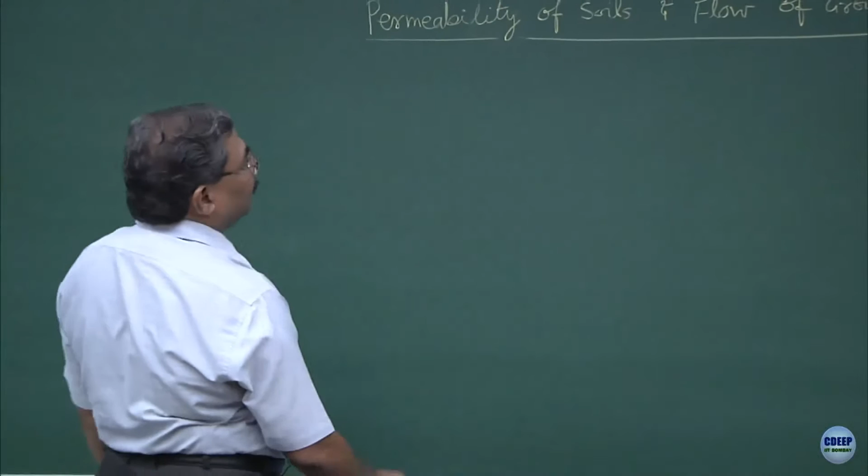So, to begin with the permeability of soils and the flow of groundwater. To make life simple, we assume that the soils are saturated. So this is assumption number 1. If you do not assume the soils to be saturated, this becomes a completely different discussion which falls under the realm of unsaturated soil mechanics.

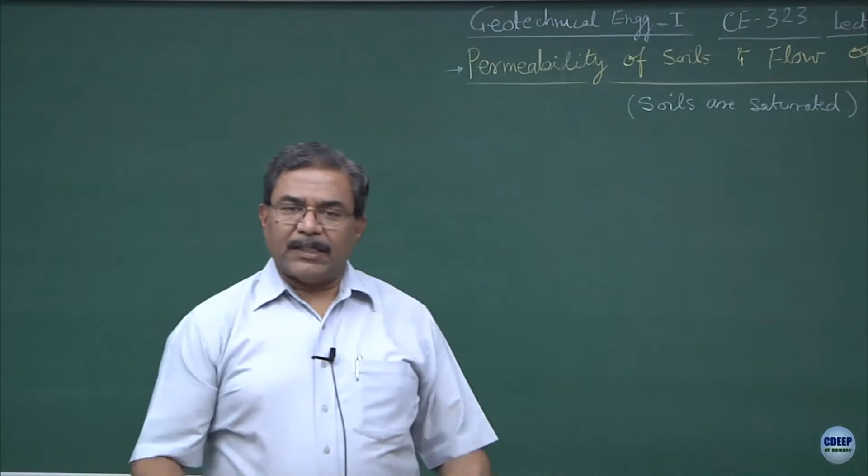At undergraduate level I will not be discussing the unsaturated state of the material, because the flow of water is going to be extremely complicated and cumbersome, and I will restrict my discussion to the permeability of saturated soils, or the flow of water through saturated soils. You have enough exposure to what capillary action does, what the unsaturated state of the material does, what the dry state of the soil does and so on.

So the best way to understand this whole process would be, you must have studied the Bernoulli's theorem in your fluid mechanics course.

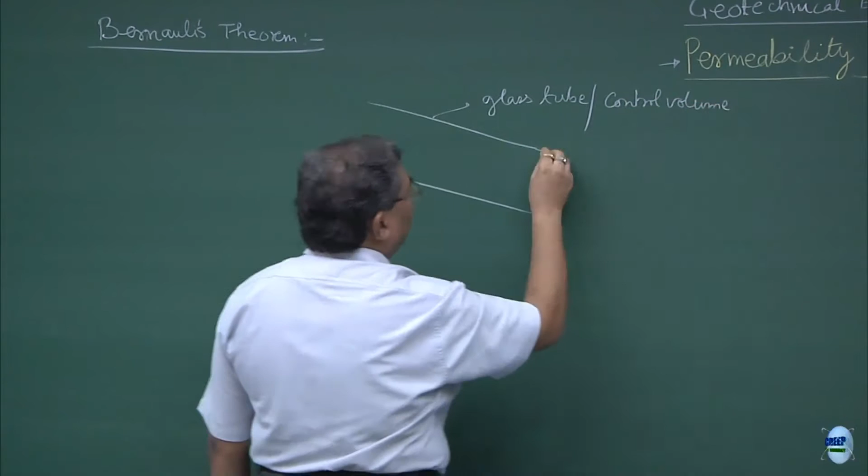Suppose if I take a glass tube, and if I allow... the glass tube can also be considered as a control volume, or this could even be a pipe through which the flow is occurring.

Now suppose if I assume that this glass tube, pipe, or control volume is frictionless. In your hydraulics course, when you deal with flow through conduits and pipes, you apply the friction factor as the C factor. But here, for the sake of simplicity, we are assuming there is no friction induced from the glass tube, pipe, or control volume, and at this point the velocity is V1, and at this point the velocity is V2.

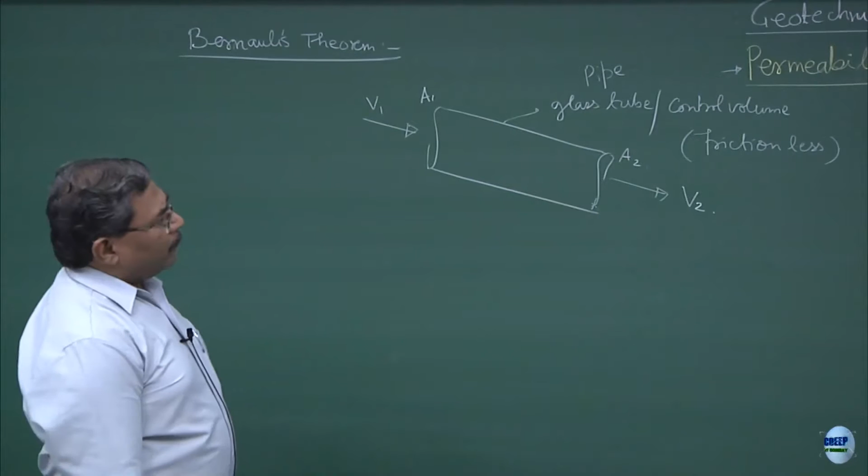If I know the area of cross section here as A1, and the area of cross section here as A2, what we are trying to do is find out what causes the flow of water between point 1 and 2. I am sure you must have done this exercise.

If I consider a datum somewhere here, I know what heads are acting at point 1 and 2, and the head difference is going to cause the flow to occur.

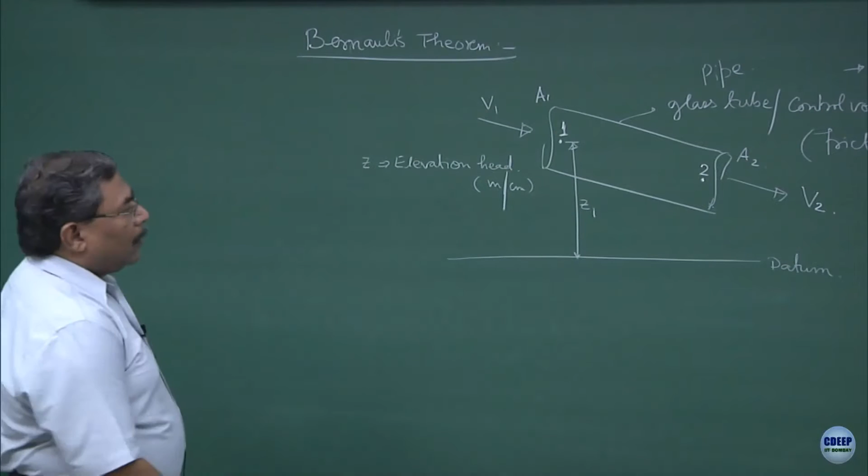So if I say at point number 1, the height of point 1 is, let us say, Z1. Now Z1 is defined as the location head, Z is defined as the elevation head, in meters or centimeters or whatever. So point 2 is located, let us say, here at an elevation head of Z2.

Now suppose if I say that the pressure head at this point, which I am defining as P1, and the pressure head at point 2 I am defining as P2 — P corresponds to the pressure head, and the units will be the pressure units. If I divide this by the density of the fluid, this becomes the height of the fluid, and the pressure can be converted into height also. So we have elevation head, we have pressure head, and the third one, I am sure you must have studied, is what is known as the velocity head.

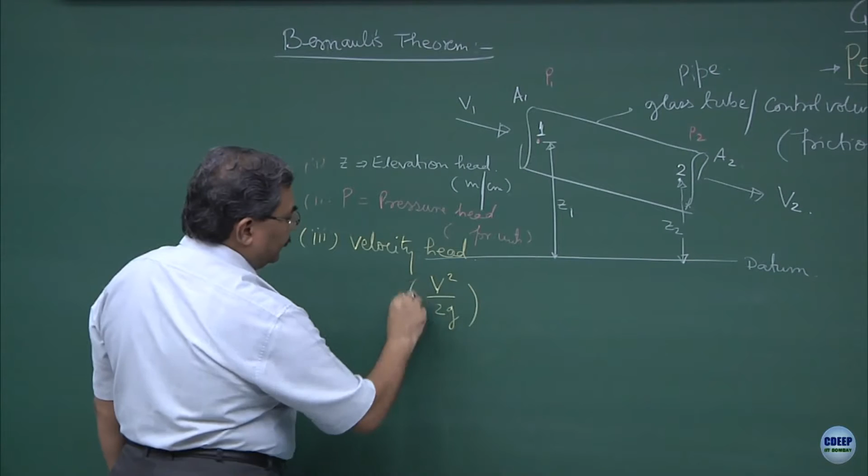Normally this is defined as V square upon 2G. Put together, that is 1 plus 2 plus 3, known as the total head. So if I say that the total head at point 1 is greater than total head at point 2, the direction of the flow is going to be from 1 to 2. Is this okay?

However, if I reverse the situation and say that TH2 is greater than TH1, the flow is going to get reverted, it will be from 2 to 1. So what we are trying to analyze is a situation where we can establish the direction of the flow in a glass tube. This is nothing but your Bernoulli's theorem.

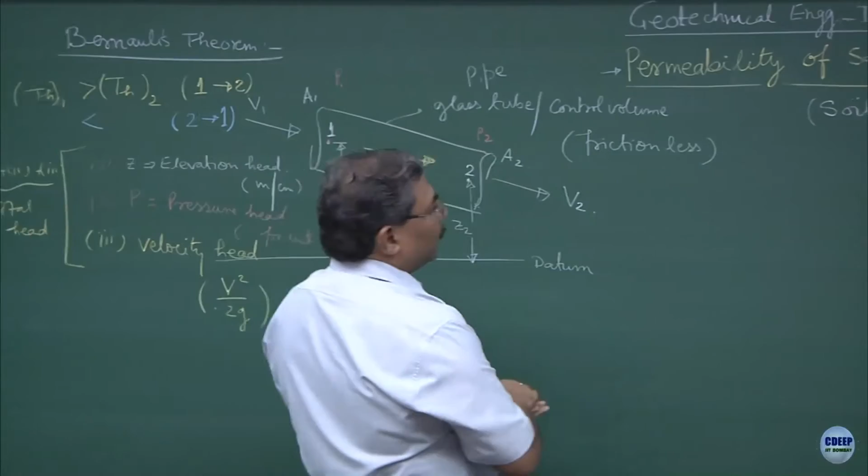Now most of the time when we use these concepts in cases like soils or the porous media, what is going to change? Suppose if I want to extend this to porous media. So porous media means, yeah, you have some doubts?

Total head is a general situation, okay. So your objection, but I have given A1 and A2, area of cross sections are different. So V2 is different than V1, I think this is okay.

Yeah, I will come to this point, just keep this in mind. So for the time being there are no frictional effects, we are ignoring it and we are trying to see whether the total energy concept can be utilized to establish the direction of the flow. Total head, always total head, velocity also has to be included, elevation has to be included, pressure also has to be included, always remember.

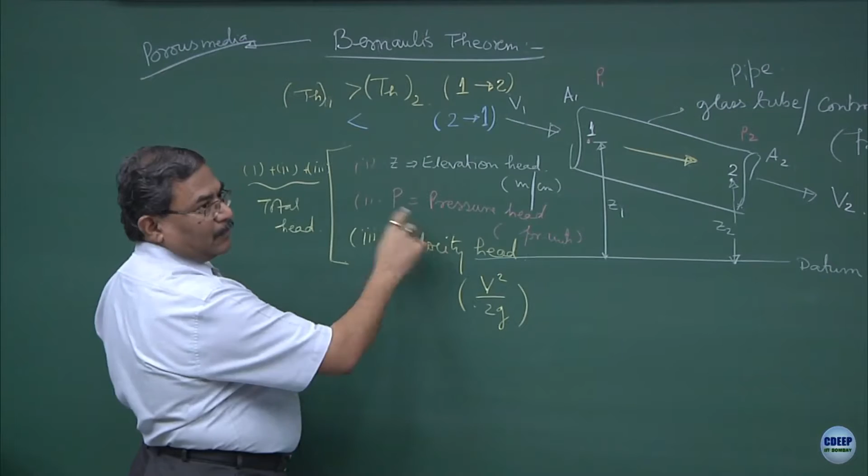Yeah, I will come to that, but unless you have created a context, what you are saying is not correct. So now let me create the context and that is what I was trying to do here. So the moment you extend this theorem to the porous media, now what you are saying is going to be correct. That means what I have to do is introduce an element of a porous media somewhere in between.

So suppose if this is a compacted soil mass, so what I have done is I have taken some soil in the loose form and I have compacted it within this tube to create this state of the compacted soil mass.

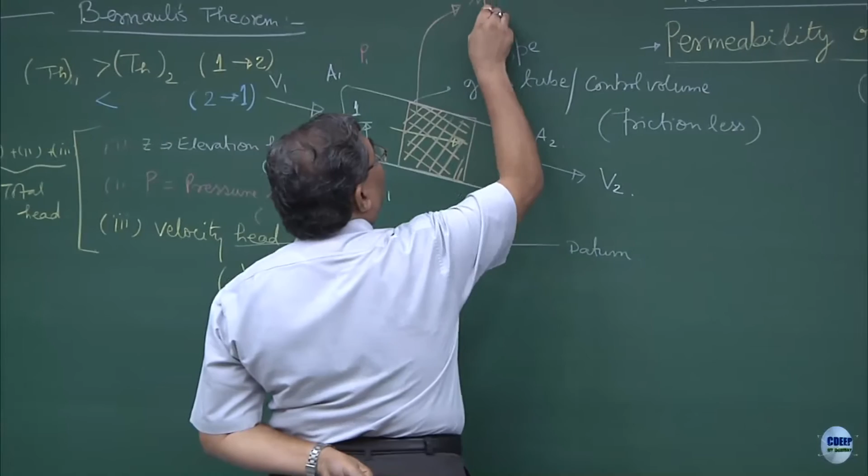So when you say compacted soil mass, the attributes of this control volume are going to be porosity, void ratio, gamma d. So this is a state of compaction, saturation, moisture content, and what else, the material. Is this correct? So material is represented by, let us say, specific gravity.

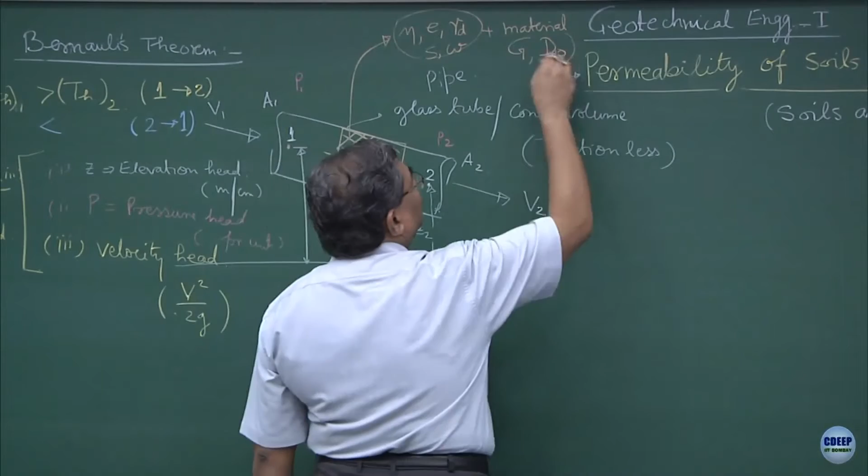Particle size distribution. What is the best way to depict particle size distribution here? The entire graph cannot be fitted, so let us say D10 or dx for that matter. Normally D10 is used to define the material, and hence we call this D10 as the characteristic dimension of the porous media.

Choice is yours, you can take dx also, but as standard terminology, this is D10 normally we use to define the material. So look what we have done. We started from Bernoulli's theorem and we are now extrapolating it to the porous media by including a porous media over here, and henceforth now we will be discussing about the flow through porous media. Is this part okay? Everybody has followed this? Any question? Fine.

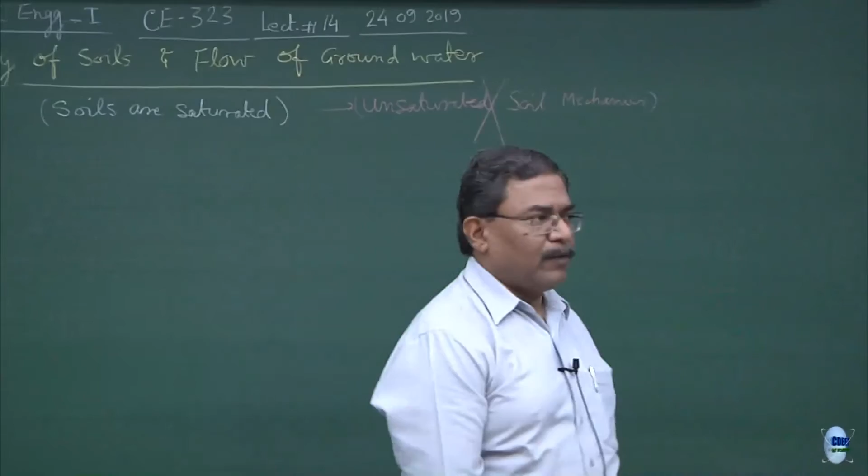So now coming to, we have defined the porous media in the form of its compaction state and the material. Now, what is going to prevail the flow? One is definitely the total energy and the second would be the Reynolds number. So we have to define the Reynolds number.

You remember what is Reynolds number? We define it as Re. So truly speaking, this is the ratio of inertial forces to the viscous forces.

Two things you should remember, never get confused. What will be this D term? Characteristic length or the diameter, correct. So, I can say this is D10, and V happens to be the velocity.

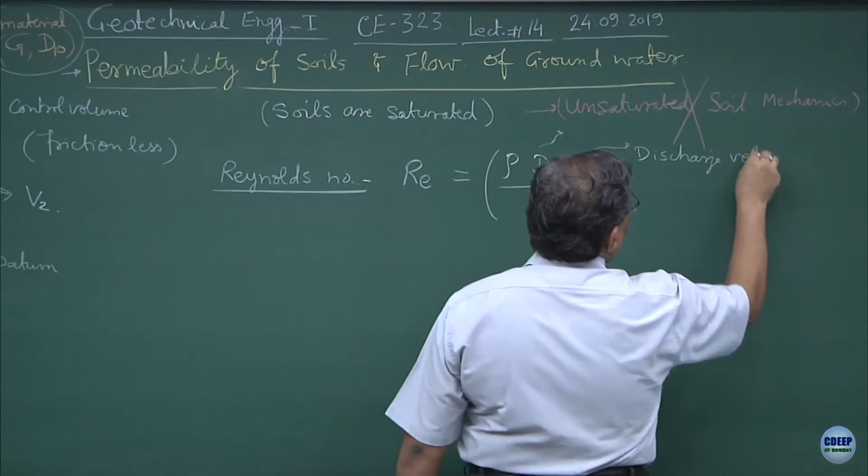So, whatever we have been talking about was always discharge velocity. Discharge velocity is devoid of the porous media. I repeat, discharge velocity is devoid of the porous media, as if porous media does not exist.

What are the possibilities when porous media will not exist? The only possibility is what we call preferential flow. That means the water... the porous media provides the resistance to the flow of water. So everybody wants easy life. So what seepage has done, what discharge has done, it has short circuited the sample itself. Now this is what is known as a preferential flow.

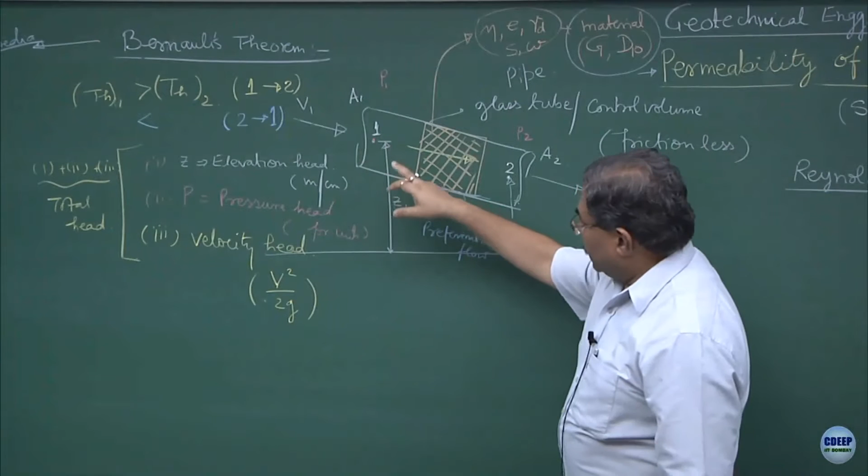Preferential flow is at the interface of two materials mostly. Chances are when you are compacting the sample, the contact between the glass tube, the pipe or the control volume and the soil mass is not perfect, and hence whatever discharge is taking place, this might take place through the preferential flow.

However, if I curtail this preferential flow, you will ask why, how? So I may put a rubber gasket over here, or I may put some different types of resins, or different types of lubricants or sealants. So what I will be doing is cutting off the preferential flow, and now I am making sure that the discharge is going to occur through the porous media only. Is the story clear?

Is this fine? Yes, please. Okay, so now I am forcing the discharge to occur through the porous media. So what I have done by doing this whole thing by manipulation, I might have created a laminar flow situation or a turbulent flow condition.

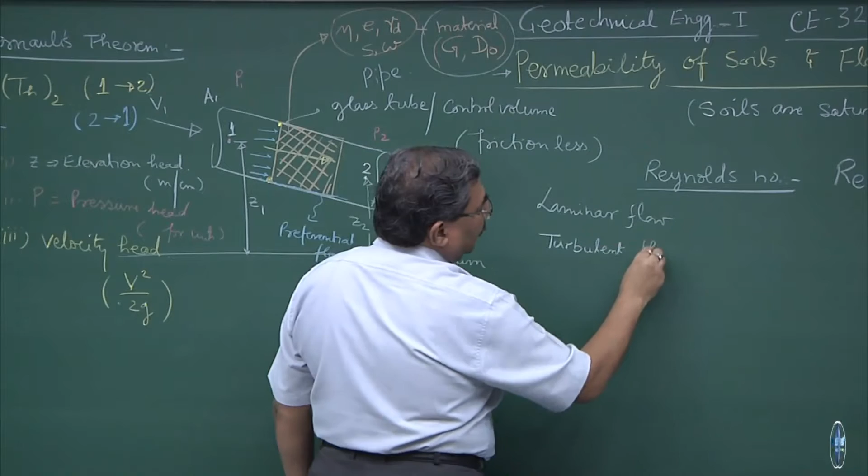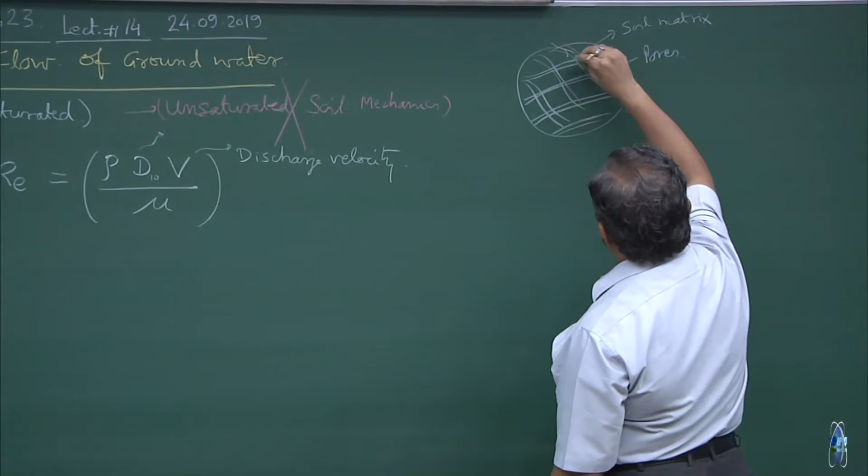As long as the flow of the fluid is parallel to all the flow paths, including the bends or distortions, the chances are the flow might occur like this. There is a bend over here, again there is a bend, and if you take the next layer, these two are almost parallel to each other. So as long as I ensure that the flow conditions are as if the flow paths are parallel to each other, including the bends, this is what gets followed in the laminar flow condition.

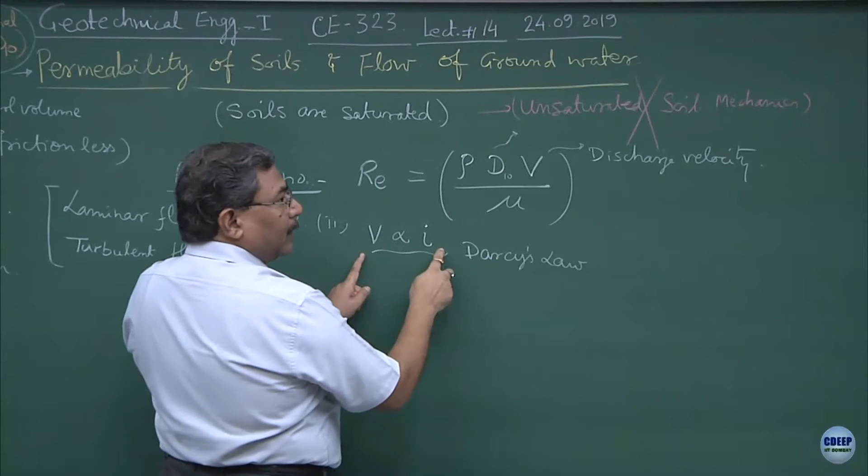The second condition would be the velocity of fluid is proportional to I, and this is what is known as Darcy's law. Darcy's law is used normally for defining the flow through the porous media. It is a linearity: V is proportional to I. If I say in generalized form I to the power n, this becomes a turbulent or non-laminar flow. So I will use this I here.

This is Darcy's law, V is proportional to I. If I say that turbulent flow or non-laminar flow is where this condition gets violated, this condition can be written as I to the power n, where n could be equal to 2 — this becomes your non-laminar situation.

The quantification of all this is done with the help of Reynolds number (RE). So in case of soils, what we say is RE is less than 1. In your pipe flow or the flow through conduits, you have taken laminar flow condition up to 2000 — RE less than 2000 is laminar flow.

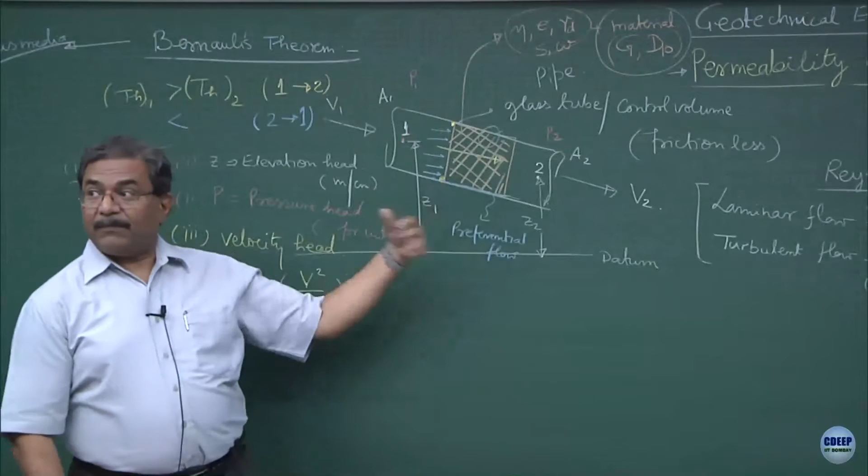So what I have done, remember, we started from a pipe conduit and then I have stuffed this with the porous media, and I have created a situation where I have forced fluid to flow through the porous media and not get short circuited. Under all these circumstances, these are the assumptions or laws used to define the flow through a porous system. There are several ways of doing this.

What you have to establish is whether RE is less than 1 or not. Density of the fluid, rho, is known; mu is the viscosity of the fluid; D10 you know because you know the material characteristics, specific gravity, and D10 from the particle size distribution curve, and at what stage you have compacted it. So the stage of compaction is gamma d, moisture content — if gamma d is known, porosity and void ratios are known, and saturation is known.

So, state of compaction and the material is getting depicted over here. What fluid is passing through this is getting reflected by 1, 2 and 3. In other words, what we are studying is the interaction between the porous media and the fluid flow.

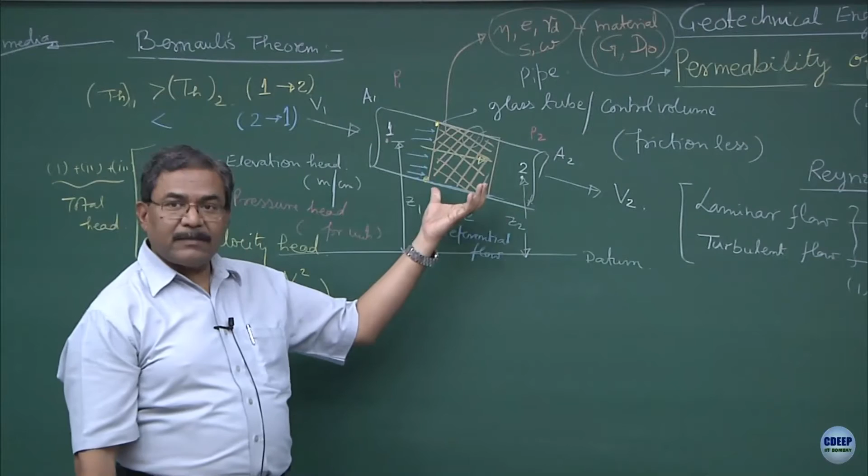Now, this concept can be utilized by chemical engineers, civil engineers, hydraulics guys, petroleum geophysicists and so on. Their fluids are going to be different - flow of hydrocarbons through the sediments is one case.

Flow of sludges through filters is another case. For a biotechnologist, a solution having all sorts of bacterial activity, microbes in it, and trying to filter it to create a clean solution for various applications - the concepts remain the same. We call this the characteristic length of the porous media.

D10 is known as the characteristic length. You see, we never talk about the third dimension because all these tubes are going to be infinite in length, you agree? So it depends upon how long the porous media has been created. So I am not interested in that.

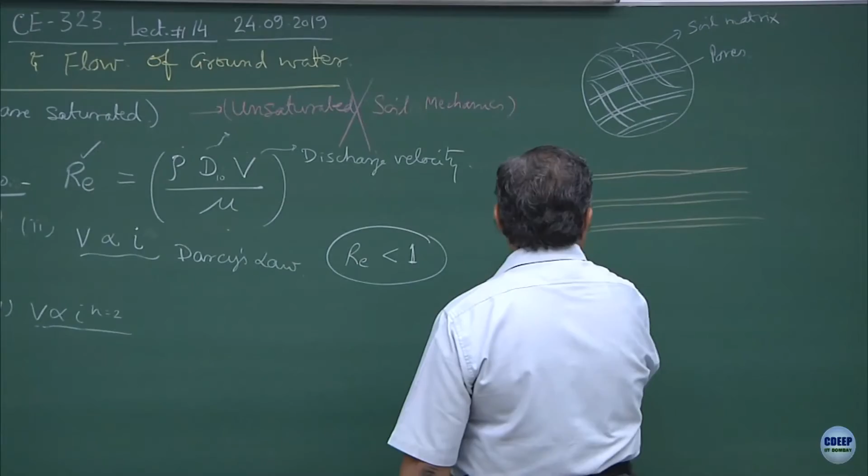What I am interested in is at this point what is happening, and if I am doing a very precise modeling by using some supercomputer or something, I will try to see how D10 is changing all along.

But imagine you have a compacted soil mass and you have to see and realize and measure how the velocities and the pressures are dropping within the sample. It is going to be extremely difficult. We will discuss these things today.

So for the time being, we are not interested in the lengths of these things, we are just interested in the characteristic diameter which is going to cause the flow of fluid into the porous system, and hence D10 is good enough for me. Why? Because D10 is going to define... yeah, that is a good question.

So now suppose if I say that this is a particle arrangement, what is the D10 here through which the fluid will flow? Yes, you are right. So this is the open space, and this space is going to depend upon the particle diameter. So these are the complications.

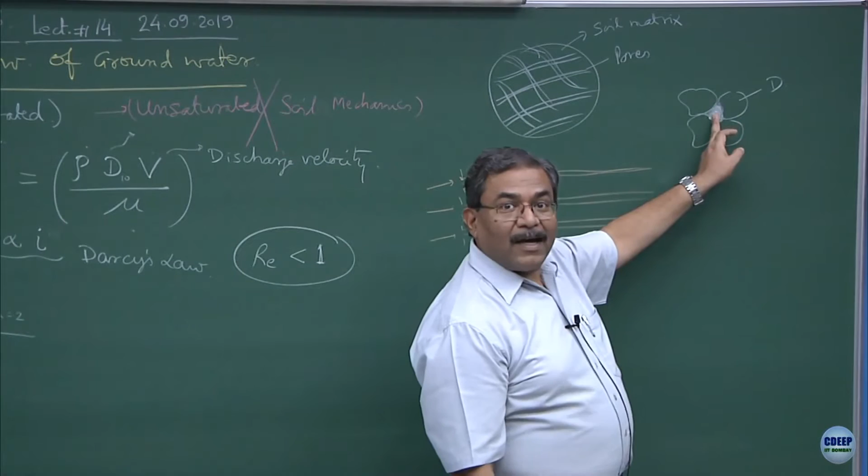I hope now you are realizing that the flow through porous media is not a very simple subject. So now you are heading towards complication. Your next question would be: what is the relationship between D and this? Another question would be: what about the shape of the particles? Another question would be: how about the tortuous lengths and so on. So this is an evergreen topic to work on, and it has a lot of commercial value.

Okay, for the time being this is fine. Yes please, anything else? Okay, so let us go ahead. So I have been talking about... yeah, N cannot be negative, I will tell you why.

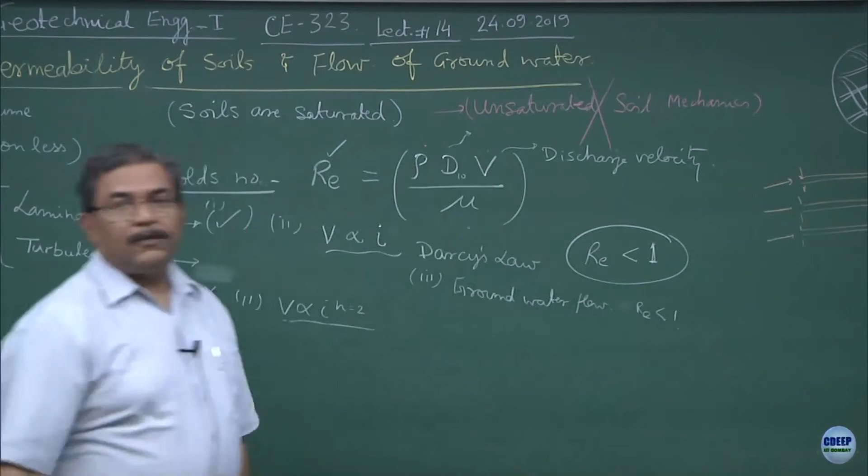Is this okay? And most of the time what happens is the laminar flow characteristic would be that the groundwater flow is always laminar, because of the properties of the porous media. Is this okay?

Now coming to your question, and what you had raised - so if this is the situation and Re is less than 1, what is going to happen to the velocity? Velocity would be tending to 0. Extremely low velocities, clear? Under that circumstance, what can I do?

I can assume this to be 0. You got the answer to your question? So now what is going to happen is, whenever we talk about the flow through the porous media, we ignore the velocity heads. Why? They are extremely small.

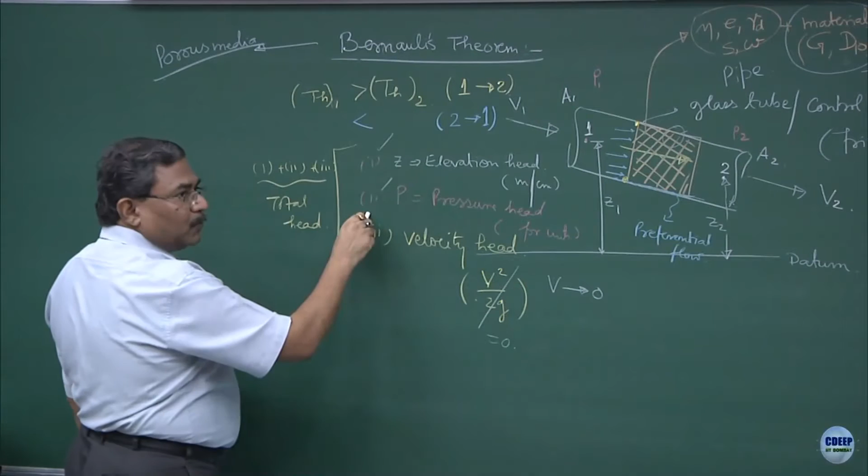And just a quick number for your reference would be: velocities would be 10 power minus 11 meter per second, 10 power minus 7 meter per second, 10 power minus 3 meters per second, and so on. So we normally do not include this, and hence we deal with only 1 and 2. So my total head becomes 1 plus 2, and then this equation and condition remains the same.

Is this part okay? So coming to the answer to your question - if I say that TH1 is equal to Z1 plus P1, and TH2 is equal to Z2 plus P2, and if I put a condition that delta TH is positive...

...so it's inbuilt that Z1 plus P1 is greater than Z2 plus P2. Even if I rotate it and keep it on the horizontal plane in such a manner that Z1 becomes equal to Z2, what I have got rid of is the elevation heads, agreed?

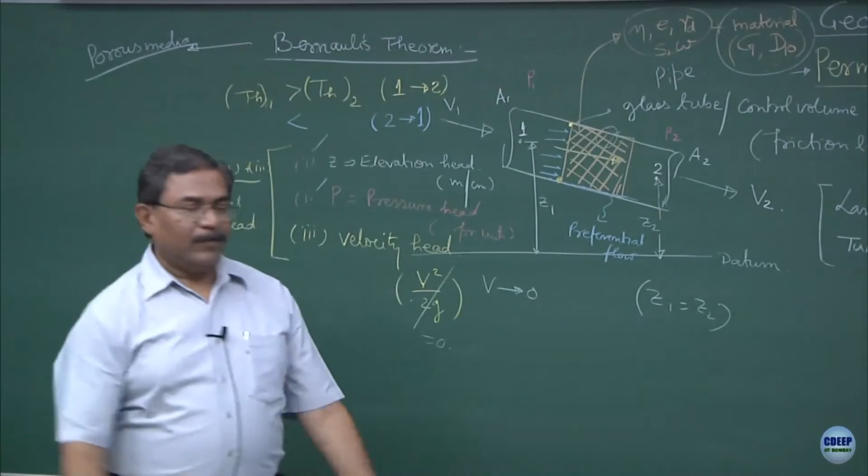So that means under these circumstances, when Z1 is equal to Z2, what I am saying is P1 is greater than P2. The pressure head is causing the flow of water to occur through the porous media, clear? And the easy way to understand this is by using a term known as I, the hydraulic gradient.

So what is I? I is equal to delta P, divided by length of the sample, and length of the sample is, let us say, L.

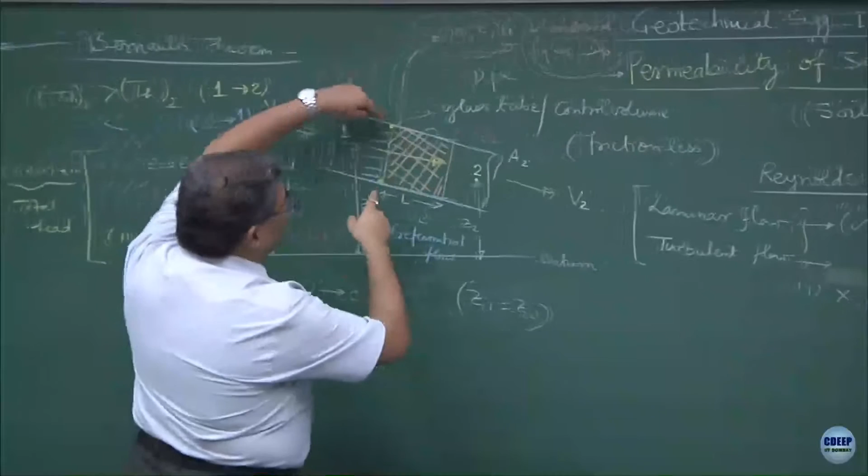Now how would I read this? One way of reading this would be, P1 is acting at this point, or total head is acting at this point. We have done some mathematical manipulation to get rid of Z2, does not matter even if I include Z2, as long as the flow is taking place from this to this point. Energy at this point is higher than energy at this point. The dissipation of the energy is taking place per unit length of the sample.

So hydraulic gradient is the term which is defined to show how pressure is getting dissipated over a certain length of the sample.

Now your question is why it is not negative. So what we have understood until now is, let us say, V is equal to K into I.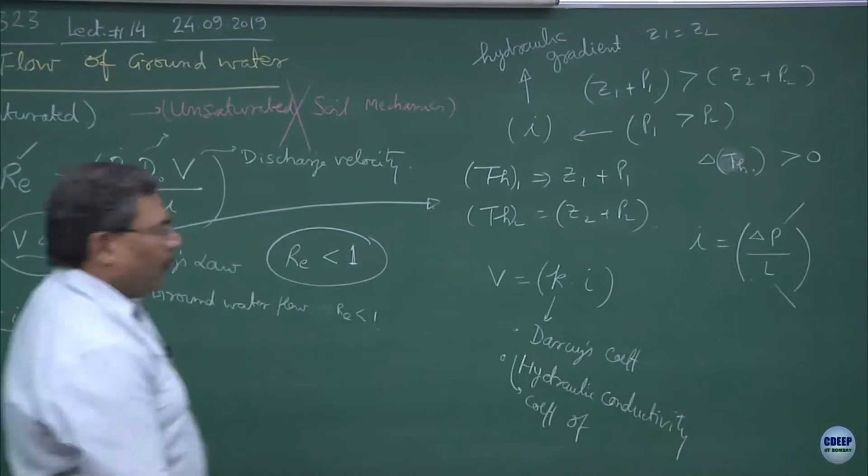Sometimes K is also known as Darcy velocity or Darcy's permeability, Darcy's coefficient also we call it as. We also call this as hydraulic conductivity, coefficient of hydraulic conductivity. I normally do not use this word, coefficient of hydraulic conductivity. Sometimes people also call this as the coefficient of permeability. It has different names.

This is the proportionality constant. What we have done is V proportional to I, we have changed to V equals K into I. Now suppose if I say it is I to the power n,

I cannot be negative because what is the flux which is acting across the 2 points? A1 into V1, correct? So it is the flux which is getting dissipated in length L. This is another interpretation. So flux has to be positive gradient, agreed?

As long as the saturated soil is concerned, remember the moment this becomes unsaturated, it is a different case altogether, so we are not talking about that situation. So as long as delta P is positive, getting dissipated along L, your velocity of flow is going to be proportional to the hydraulic gradient, agreed? It cannot be reverse of that. What it says is, if I increase the hydraulic gradient, the velocities are going to be more and vice versa, and that is true.

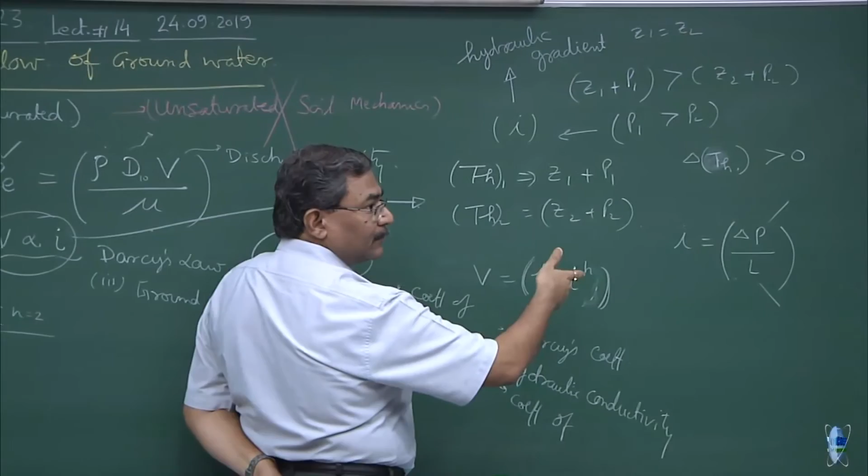So this term now we have agreed that I will be positive. I can write another expression that Q is the discharge, and this is equal to velocity into area of cross section. So Q will be equal to K into I into A.

And for your quick reference, if I say Q upon A, what is Q upon A? The small q. So small q is nothing but the flux.

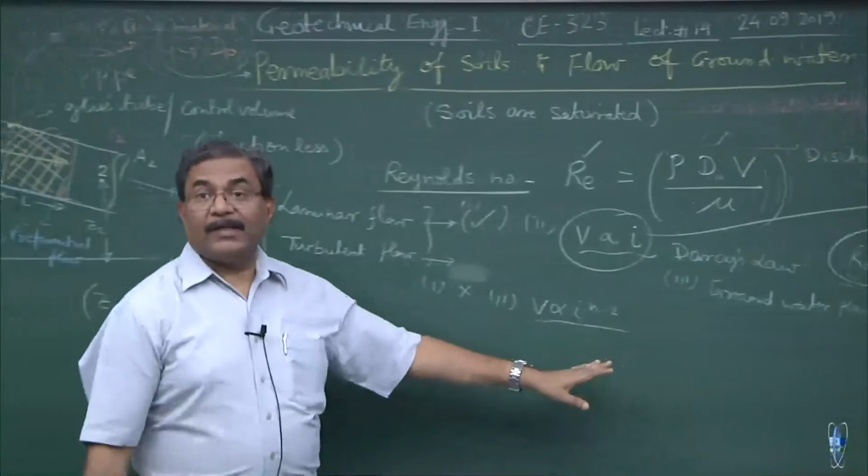Now in today's world, how these equations are being manipulated, please understand in 2 minutes. We are talking about here all fluid flow, clear? What I have to do is, I have to apply a flux gradient to cause the flow of something.

Is this correct? So the guys who are working in the field of electromagnetism, what they will be doing? They will be applying electric field gradient across the sample to pass current. Chemical engineers, what they will be doing? They will be applying concentration difference across the 2 points to create a diffusive current, agreed? C1 concentration of chemicals, C2 concentration of chemicals, delta C upon L is nothing but the driving force which is equivalent to the concentration gradient, and I can compute everything like this.

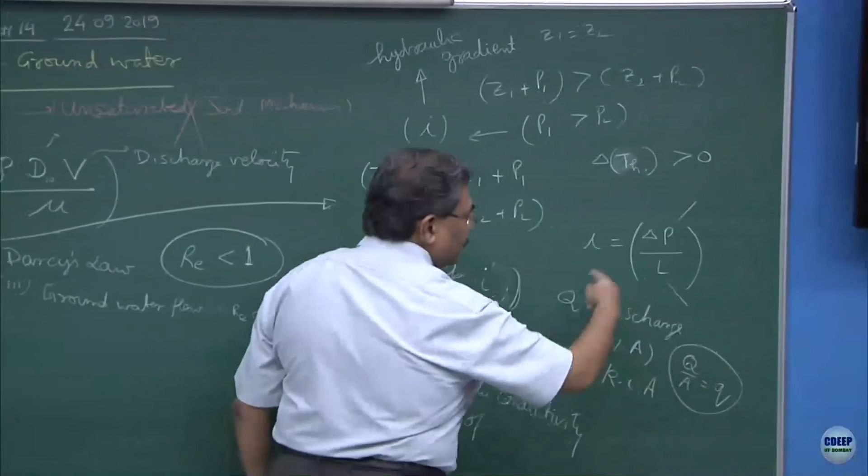Only thing which is going to change is K. So here K was Darcy's coefficient, hydraulic coefficient, permeability coefficient, there K will become diffusion coefficient. Is this part okay? This is in market right now. Everybody is trying to do extrapolation of these things in different energy field concepts to cause the change in the total head.

Yes. How can I manipulate the total head? Tell me. One of the ways would be I can lift this up, but it is not going to help. Why? As long as datum remains same, I am not going to achieve anything.

Then pressurize the points. Pressurize, apply the same problem number 4. So there is atmospheric pressure or some gas pressure which is acting over here. Now what is going to happen? This pressure gets added to this. Unfortunately this pressure will not get delegated up to this point. Why? Because there is a shock absorber, pressure absorber, clear?

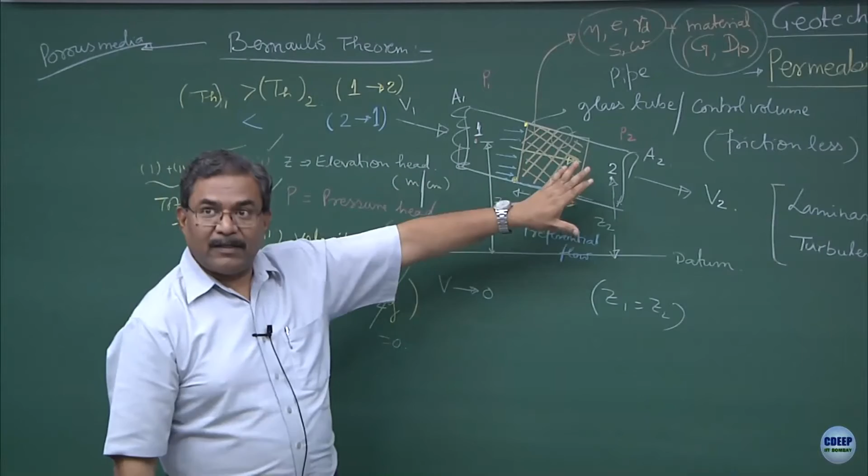So now you have to do an experiment to find out how much pressure is getting delegated at this point, which is definitely going to be less than this. So what I have done? I have done one manipulation to create a different type of total head at this point as compared to this point, and that is my requirement. Is this funda clear?

What could be another way? Suppose if I rotate the whole system, now what is going to happen? That is the trick. Are you getting this point? So suppose if I rotate the whole thing, this point always sits above this point, agreed? Head at this point, elevation itself is going to be higher than elevation at this point. So the discharge is going to take place from this place to this place. Another manipulation, okay.

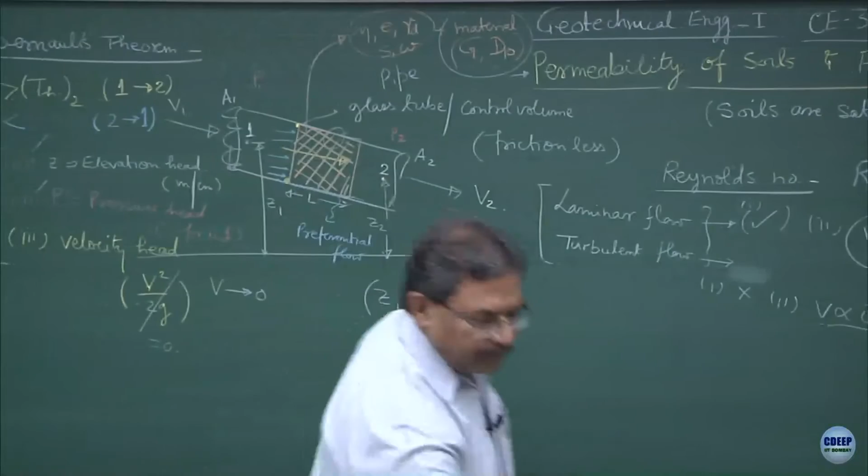Imagine now hundreds of situations like this and go ahead with the engineering. There is another good application of D10 which you might come across in some books. There are people who tend to find out K. Now the question is, how would I get the K value? So let us discuss this a bit. Determination of K.

Please make sure that you write small k, because later on I will be using capital K intentionally for something else. So right now I am dealing with all small k's, alright. Do not mix up small k with the capital K.

There are different tests which you can do. Some are laboratory tests which you will be conducting in the laboratory, and they are known as constant head test, and falling head test. These are the two most prevalent tests.

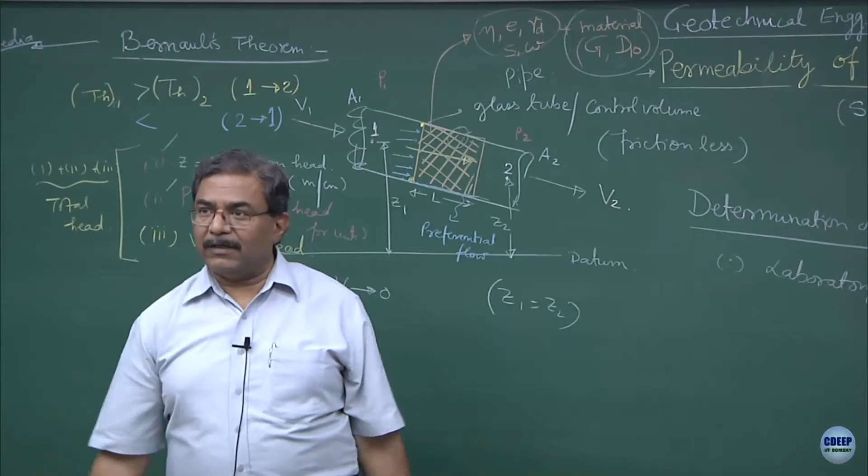Anybody is doing centrifuge modeling here as a BTP or whatever? No. Centrifuges are also utilized to get the hydraulic conductivity. We have done a lot of work in this field, so you can check the theses and papers written by A.K. Gupta, myself, and some of your seniors who were doing BTP with me. Anup Ramchandra Rao, he is the guy who has done a lot of work. He was my BTech student. I will show you what he has done. And so you may use the centrifuge modeling also.

What essentially these tests are: the first test is a constant head test, number 2 is falling head test, number 3 is centrifuge test. In a centrifuge I can do both tests 1 and 2. So in the first one what we do is that is known as constant head test.

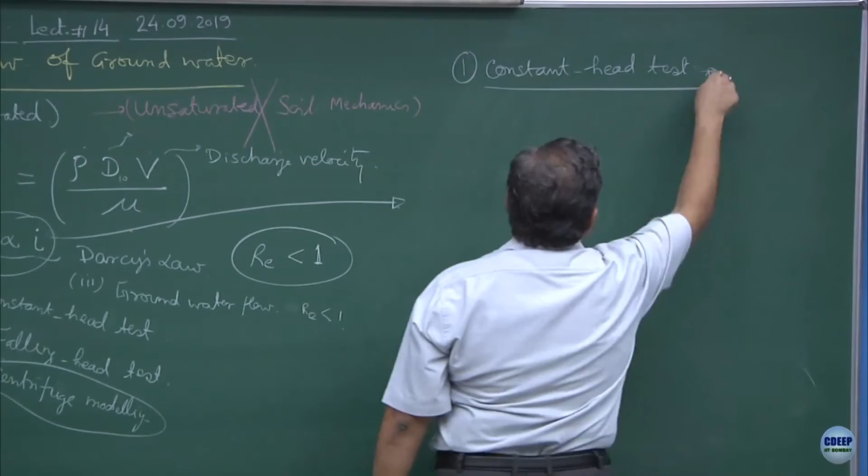Normally this is performed over granular materials. Granular, why? Because the permeability is so much that if I make a control volume, alright, just now I was talking about rotating the whole setup by a certain angle so that it becomes like this. So suppose this is my porous media or the sample which I have prepared, this is the soil mass, compacted soil mass.

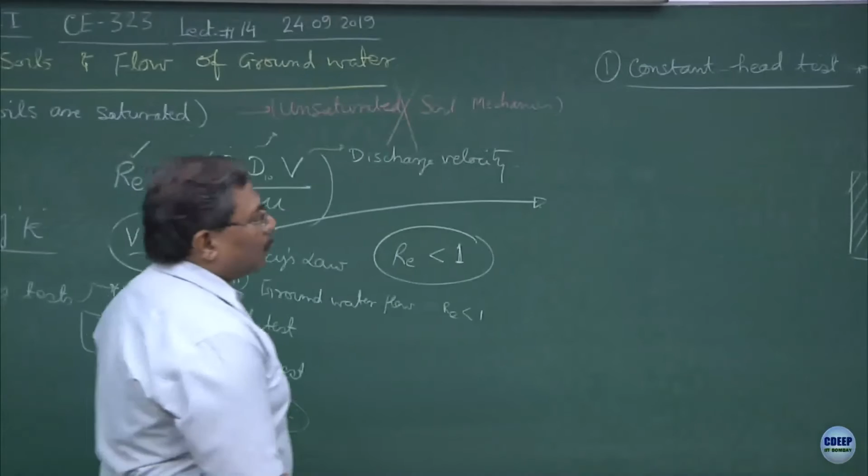Now what we do is, the principle is like this, that we allow flow of water to occur by maintaining the head constant here. So head remains constant, and I was explaining to you why porous media has to be granular when you conduct constant head test, because the permeability is so high that unless you maintain the constant head, the hydraulic conductivity values are going to be incorrect. Fine. So what we do normally is we connect it to a reservoir.

There will be something like this which is connected to a reservoir, and this reservoir will supply the constant pressure head at this point, and the discharge takes place here, and we measure this over a period of time, and then from here we can compute K value. Is this okay? If you measure Q, hydraulic gradient can be obtained, area of cross section is known, alright, velocity can be obtained or K can be obtained directly.

Simple test used normally for granular materials, because of their high permeability. The more challenging is the second one, which is falling head test.

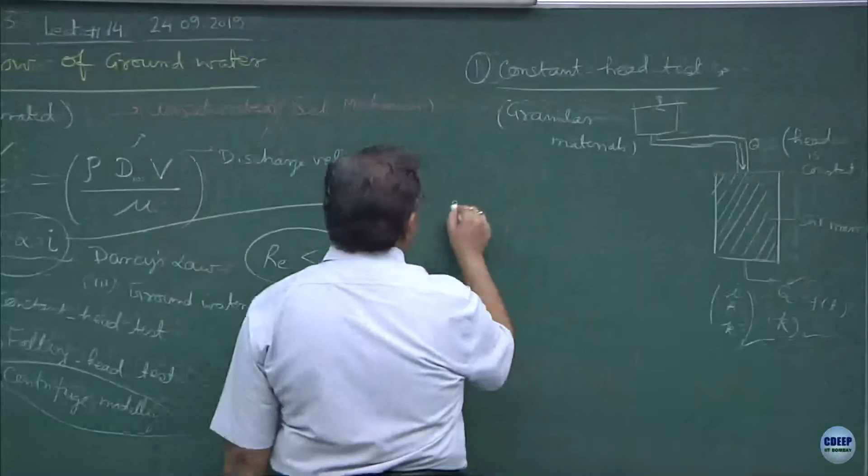This is normally done on materials or soils which are fine grained. Why? Because the permeability of the fine grained compacted materials are going to be extremely low. So you need not maintain the pressure always, alright, constant head.

So here what we do is we will expose this system. This is the control volume of the soil which I have made, and this will be connected to a tube, glass tube, which is graduated. So here you have graduations. We fill it up with full water after compacting the sample to a certain moisture content gamma d, and we wait for this water to drop over a period of time, and we measure the Q value.

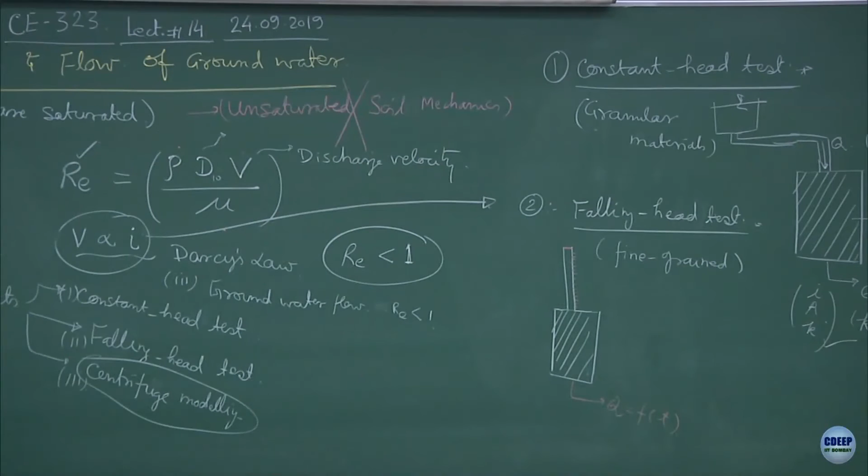So this Q is also a function of time. One thing you can appreciate here is that the total head which is causing the fluid flow is decreasing, is it not? You agree? So delta H is negative.

So, this is the experiment which we will be doing in the lab. If the area of cross section of this tube is known, let us say small a, and the area of cross section of the sample is known as capital A, you can do the continuity equation. This is nothing but continuity, is it not?

The continuity equation will be: this Q which is dropping down, or the discharge which is taking place, is entering into the soil sample. Hence Q in the tube will be equal to Q in the sample. Q in the tube is not a porous media.

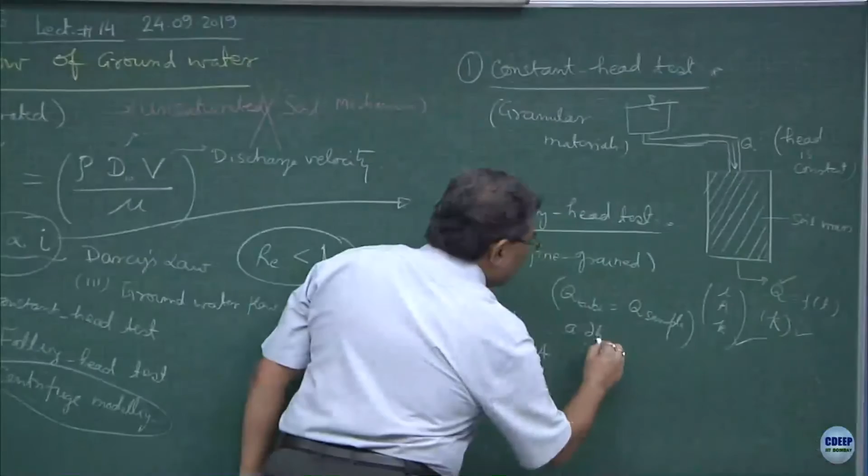So, this is only the area of cross section multiplied by the velocity. What is the velocity in the tube of the falling water level? Del H by del T. Negative sign, because H is decreasing.

So, this has to be equal to Q of sample, permeability of the soil mass, multiplied by I. What is causing I? H, the hydraulic gradient at a given time. So, what I am assuming is that the head difference across this point is H, though H is decreasing, and that is what I am getting reflected over here, multiplied by K into H upon L. L is the length of the sample, the physical dimension of the sample.

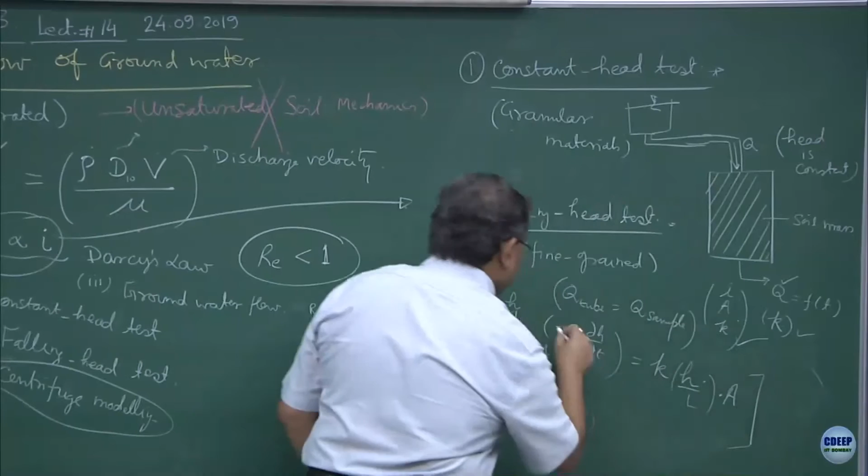So, K into I into A, solve this expression and get the value of K. You understood?

In this expression, because I am doing the experiment, I can find out as a function of time how H is changing. I can record the values and I can measure the discharge. So, H is known for a given instance, L is known, area of cross sections are known. You solve this, and it comes out as a log function.

Do you remember the function? 2.3 something, you can solve this. This will be del H upon H equal to K A upon L into A into dt, and then integrate it from 0 to H, capital H or whatever.

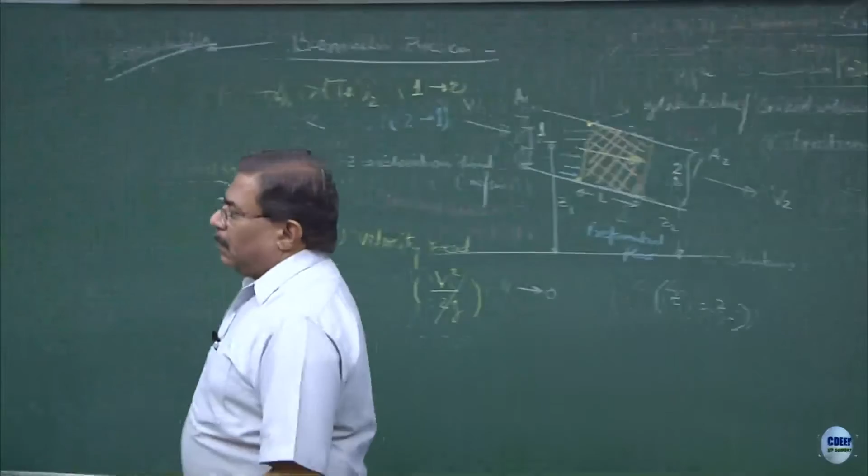This is okay. Remember, the dimensions of K are going to be velocity dimension. I hope you can realize this, because in this expression V is equal to K into I, so I is a non-dimensional term.

Pressure can be equivalent to the height, elevation is height. So, this is the height term, normally we deal with heights only. Similarly, at this point divided by L of the sample, which is a height. So I is a non-dimensional term. Hence, K is mostly in meter per second unless specified.

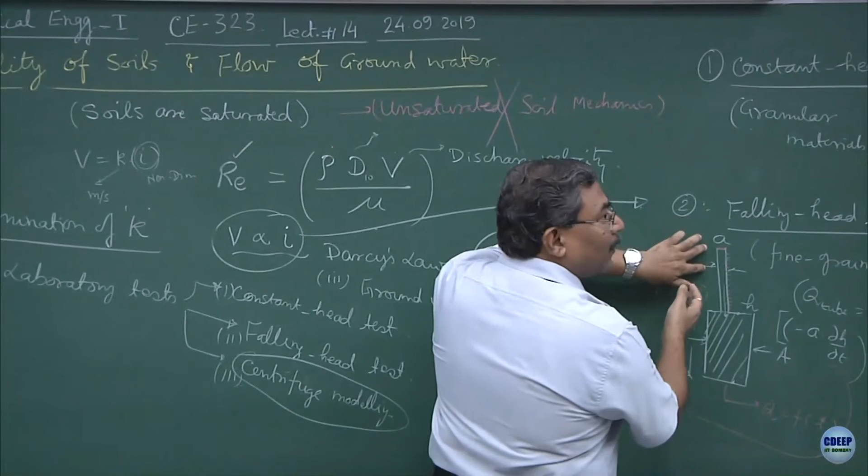So, what we have done is we have obtained the K value in a laboratory setup. You are assuming that whatever head is dropping over here, delta H, that is this value. So velocity is delta H upon delta T multiplied by area of cross section — this is the discharge — and this discharge goes into the sample continuity, that is it.

H is the head, H is the head. I will introduce this concept slightly later. So, if the head is causing the flow to take place, this is the equation.

Now, what I can do is make miniature models of these setups, install them in the centrifuge and do the test. That is what most of the Japanese, Koreans and Americans are doing, yes.

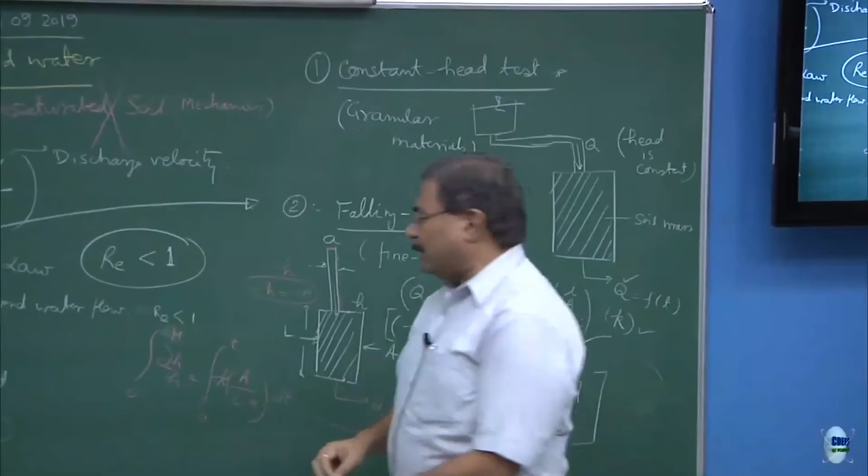This is your K into I. What is causing the hydraulic gradient? The head across the sample. I can do a manipulation, keep the datum over here, so everything becomes 0 at this point. Total head at this point is H, so this becomes H upon L.

So, another way of finding out K is what some people are using, particularly consulting people. They use an equation: 100 times D10 square. This is in centimeter per second. You will find this type of equation.

Unfortunately, these equations are valid only for granular materials, though they are extending it to fine grained materials also, because D10 is being used. So, let us remove D10 from here and make it D square. Let us take a simple case so that you can follow and get rid of all your doubts.

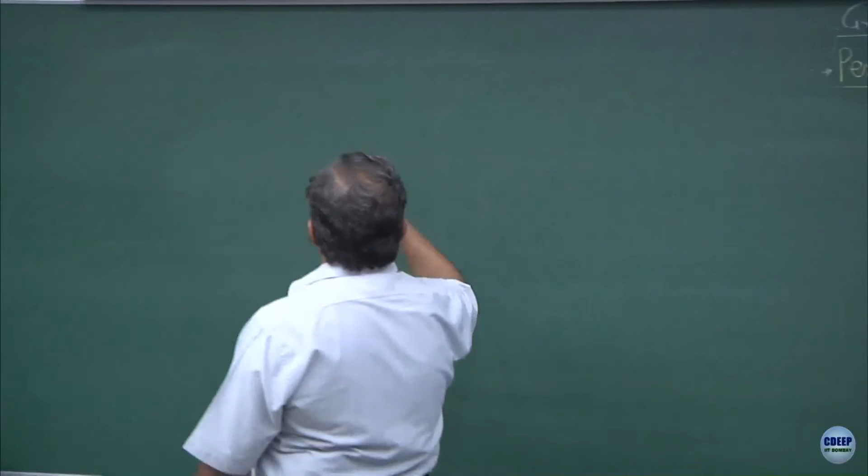Suppose I take a case like this. Suppose there is a vessel, and in this vessel water is filled up to this point. I give you 2 points, one here, another here. Show me what is the direction of the flow.

The best formula to understand these types of things is to fix a datum here, and compute the point number 1, point number 2, let us say elevation head. What is the elevation head at point 2? What is the elevation head at point number 1?

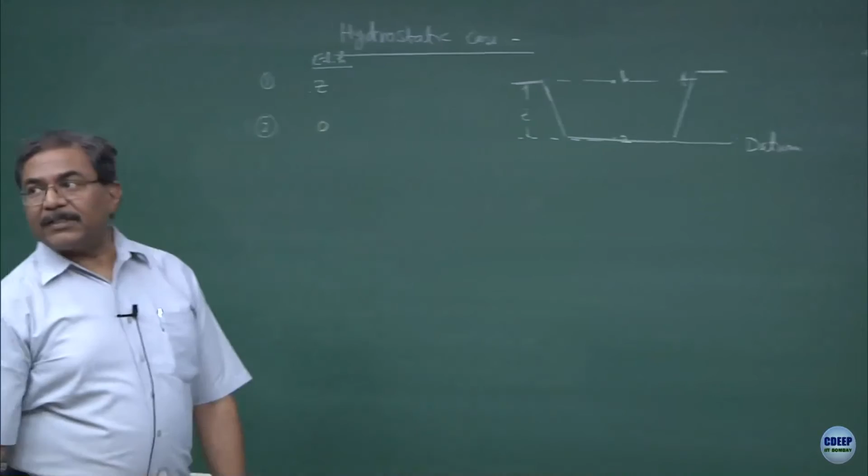To make life simple, let us make it at the atmospheric surface itself, the piezometric surface, where the atmospheric pressure, temperature conditions are acting. What about point 1? Elevation is Z, at this point elevation is 0. What about the pressure head at point 1? Atmospheric is acting here also, so it is 0, you are right. What about the pressure head at point 2?

Are you sure? Why? Take a piezometer here, install it up to where the water level will go, height Z. Simple rule: always put the piezometer or a tensiometer. Up to what height does it go? What is the total height? What is the pressure gradient? What is the hydraulic gradient?

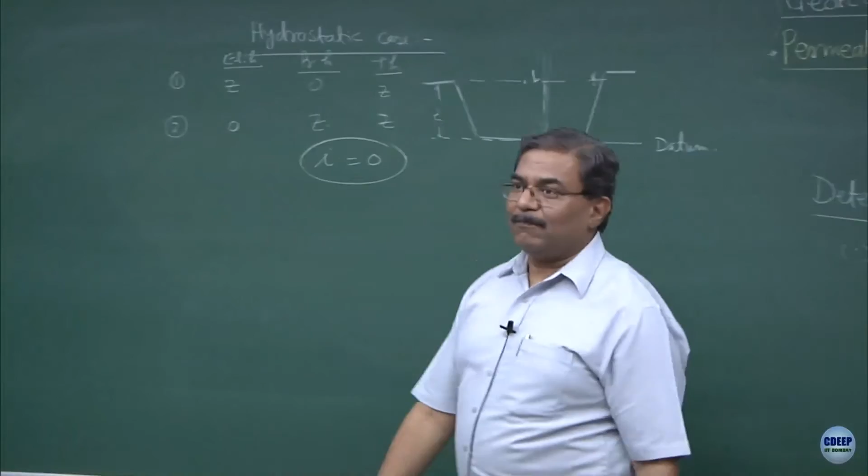So, I is 0. What is the meaning of this? This is a case of a hydrostatic problem, agreed. I can do different types of manipulations over here. The real fun is the moment porous media comes into the picture, because as long as porous media does not come into the picture, there is no fun. This is a hydrostatic case.

I will induce flow through the porous media by, you remember that tube which I had plotted, just tilt it a bit. So this is case A, and now let us talk about case B. This is the porous media, this is the water level, and this is kept in the water bath.

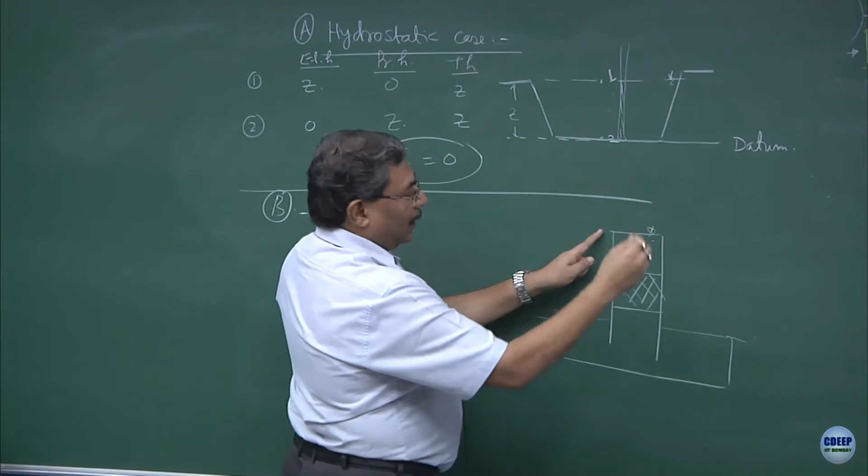So here I am showing this as the free water surface, this is the free water surface. Now, how do I maintain it is my headache. I can connect this to a reservoir upstream and downstream to another reservoir, it does not matter, this is all redundant, as long as I have the pressure conditions over here. Now let us say point number 1 and point number 2, do the same analysis.

Suppose if I say L is the length of the sample, area of cross section is known, material properties are known, this is the height h, and at this point suppose this is h1. Let us do one by one.

What is the elevation head of point 1? Select one datum. Normally, to eliminate all this complication, I can put the datum here itself, this elevation and all, agreed. It is your choice, you can put the datum here also, but then it becomes more complicated.

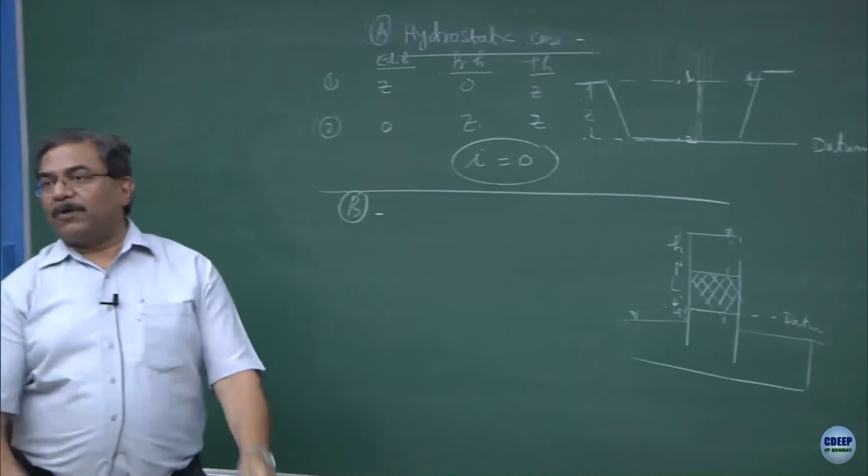At point 2, what is happening? What is the elevation head? 0. At point 1, this is L.

What is the pressure head at point 1? How to compute pressure head? Please understand this, do it in your notebooks. Use the piezometer, a small tube, fix it over here, up to where this will go, fine, h height.

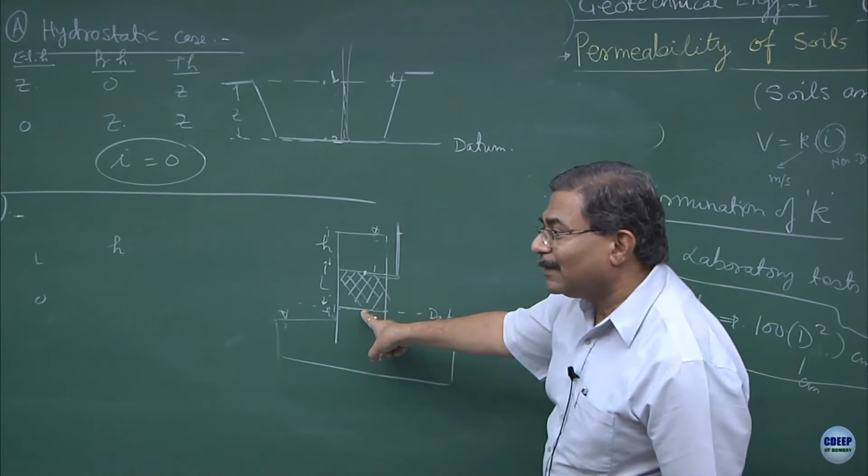What about this point? h plus L, you are right, but why? Have you understood this or was it a guess? Why? That is an interesting thing.

So, until now whatever you have studied, saturation, partial saturation, variably saturated case, remember tutorial number 3 where I have created S as a function of depth and specified saturation limits. As long as this happens over here, your answer is wrong. However, the moment you assume the whole thing is saturated after a steady state has been achieved, it is correct.

Now, if you put a piezometer over here, you have two options. What are the two options? This is atmospheric, this is also atmospheric. Are you getting the point? This point is connected to the atmosphere, is it not? So let us do it in a simple way.

If I shift my datum over here, what is the pressure head at this point? This much. If I put a piezometer here, where will it go? This is what you have to understand. It can never drop. Even if I put a piezometer here, what is going to happen? It is going to go up to this level, it will never drop down. So please do not get confused with this.

That would be the capillary action. When you have negative tension zones developing in the system, then only the pressure at this point will try to get nullified with the atmospheric pressure. As long as this pressure and this pressure are atmospheric, the only possibility is that if you put a piezometer over here, it will go up to this plus this. Is this concept clear?

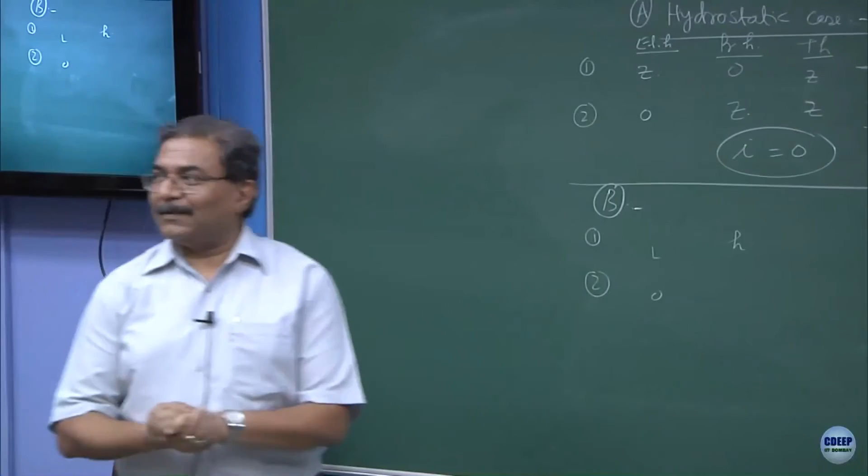So, your answer was correct, but have you understood the thing? Chalo, it's okay. What?

Everything is under positive pressure. There is no reason that the pressure will drop from here because the entire thing is exposed to the atmosphere. This surface is the same as this surface as far as the pressure conditions are concerned. These are basically isopressure points.

There is no capillary here, remember this is the glass tube, this is the soil, I am just talking about this water body in which the glass tube is dipped. The complication I have done is I have raised this level a bit, so that here also you have water, but truly speaking the pressure at this point and this point is all atmospheric.

So what I have to do is either reduce the size so much that it becomes a capillary tube, number one. These are finite dimensions, not infinitesimally small in dimension, clear. So capillarity does not come into the picture.

Second thing is, we have assumed that the system gets saturated over a period of time, so this soil is completely saturated, clear. Now you are connecting the whole system like this.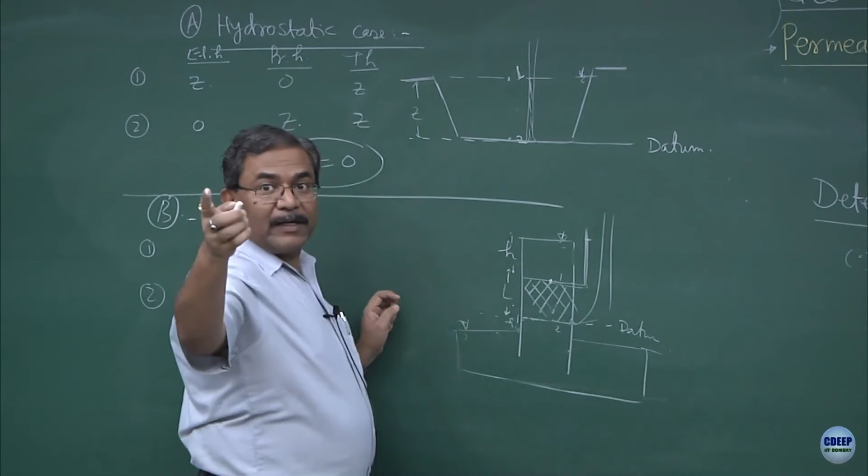So what I am trying to expose you to is the concept of trying to understand what pressures are acting across the samples. This is easy, somebody said atmospheric - atmospheric is acting here also, atmospheric is acting here also, that gets nullified.

Now, what is over here is the elevation head plus pressure head because of this water column, it is okay. This fellow said elevation is whatever, depends upon the datum. So elevation is 0 here, and what is the total head? This plus this, because of the pore pressures. So let us write here the pressure would be H by L. So what happens to the total pressures?

See, again I have created a situation where the flow is not going to take place through the system. Why? Because he said that at this point, what is the total head? He said H by L.

So one of the ways to come out of the whole situation would be if this whole thing is placed in a water bath like this. What is the total pressure at this point? So this is the L, yes.

So what I can do is I can assume this water column of delta H, a very infinitesimal volume, and I can assume that this is the head acting at this point, which is variable. So now it is alright.

So as your H changes, this is the velocity through which the water is getting discharged in this tube - area into velocity of water. This H remains universal, this H is also acting on the sample, this remains H. What is causing flow to take place? H. So H upon L is the hydraulic gradient, area is the cross section.

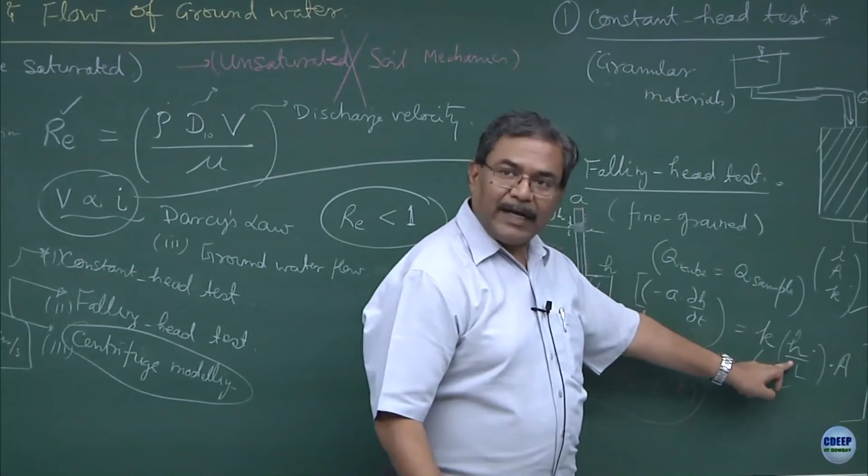I have generalized the whole thing, I do not care what is the pressure acting at what point. I am simply saying, as far as this is a datum, I am assuming everything from this point to H, which I can measure, alright. And the moment H is measured, H is generalized.

So rate of change of H in the glass tube is nothing but the velocity of water discharge multiplied by area of cross section, clear. And this H is also causing discharge to take place through the sample.

So this becomes your H by L, i into K into area of cross section. H by L is the hydraulic gradient which is causing the flow to occur, because delta H of H is causing the flow to take place. A small change in the height of the water column is your velocity component. That small change in H is also causing the hydraulic gradient which is acting on the sample all the time.

So now your question is what? Repeat it - integration. Choice is mine. I might be doing this experiment to measure H1 and H2, and the fall from H1 to H2 is in a given time t, that is it.

Got it? So basically this is going to be integrated from H1 to H2, in a time 0 to t, okay. Now, the rule of the game is, normally we do not allow significant changes in the head to take place. Why?

Because we are talking in terms of infinitesimal changes, delta H, truly speaking delta H should not become a meter, because by the time the entire water passes through, H is getting drastically changed. So discharge in the tube remains same as discharge in the sample, but truly H is decreasing, and when H decreases, K also decreases. So you are doing a test where the hydraulic conductivity or the parameter you wanted to obtain becomes a function of time or head, which is not a very good thing.

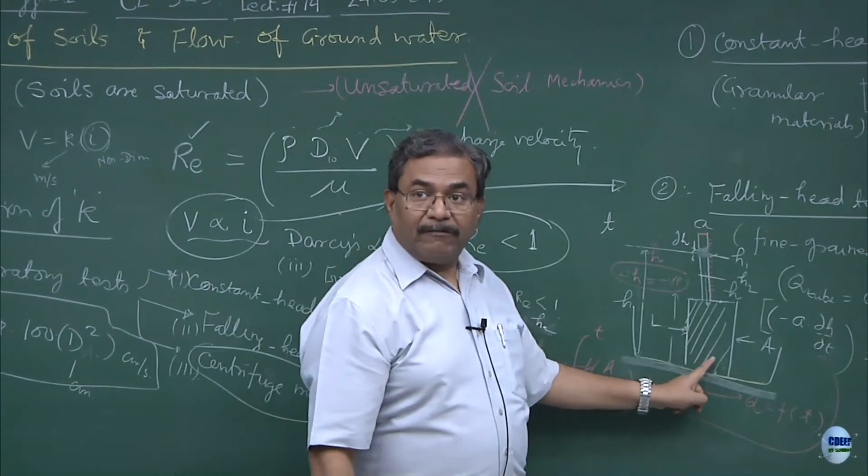Now let us restart this business. Using all these concepts, where they are being used and what type of questions are being answered, I am just trying to show you. Concentrate a bit.

We will answer the sand boiling phenomena also. If you remember the first lecture, you had seen a movie, correct. So now you are going to get the answers to all those questions about what seepage does to the soils. If you type on the net, sand boiling...

This is what happens when an earthquake strikes. If you really want to do the analysis of these types of situations - what we are studying here is a static case, though this is a hydrostatic case, and I am trying to convert this problem into a flow through porous media case. A real dynamic case will come when an earthquake strikes the deposits or soils and tries to liquefy them.

I hope you can see that this is what is going to happen. These are beautiful sand boils which you can see on the beaches, and that is why warnings are given - do not go to the beaches when it rains. The whole thing has liquefied. This is a beautiful example of what seepage does to sandy soils. You are seeing a boil and the entire soil has got lifted up and is flowing like a fluid. This is what is known as liquefaction.

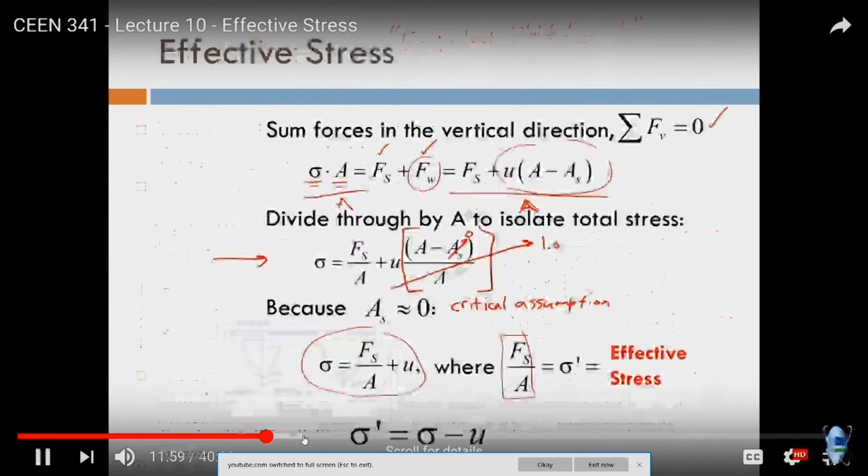I will prove how sand boiling occurs. If you see this video, it is an interesting video where the influence of seepage and the concept of effective stresses is demonstrated. This is something you can go through whenever you get time, how effective stresses come into the picture and how the boiling of sands might occur. It is a beautiful example of how the pore water pressure rises and changes when the water table changes.

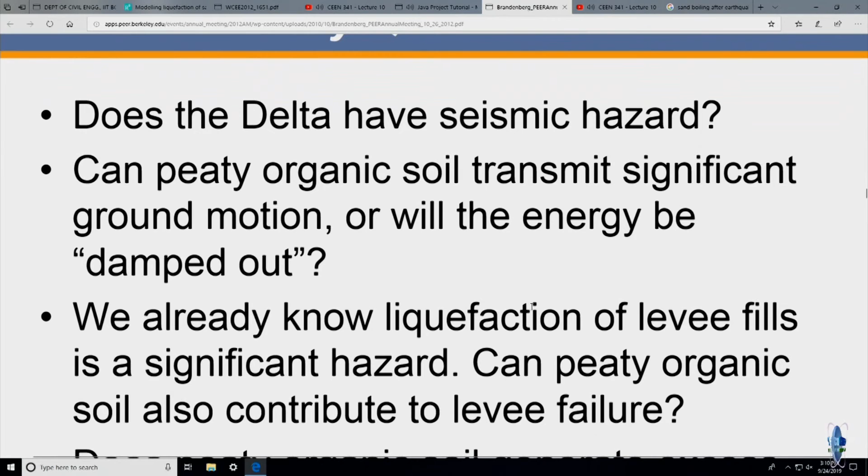So the more and more water you draw for irrigation purpose or commercial purpose, the whole thing might subside and ultimately failures might occur. So the embankments have failed because of the subsidence of the ground. Remember we were talking about delta formation, sedimentary deposits, and whether they liquefy or not because of the earthquake. Though peaty soils are cohesive soils, they are also bound to liquefaction.

There is a lot of research being conducted in this context, and here the question has been whether the delta has seismic hazard, and the answer is yes, because they have done the seismic hazard mapping and shown that it fails. So this is the influence of the earthquake which they are studying on the soil mass, and this is how the modeling has been done.

So, before the earthquake, the whole condition of the embankment is like this, and after the soil liquefies, what happens? There is a sort of subsidence and there is a failure.

All these problems can be modeled easily using the concepts we are going to discuss. We have to define terms like hydraulic gradient and seepage force acting on the system. There is an interesting paper you should go through, those of you who are interested, about the 2011 earthquake in Japan and how sand boiling characteristics were modeled. Everything comes from basic principles like liquefaction, sand boiling, grain size distribution and permeability.

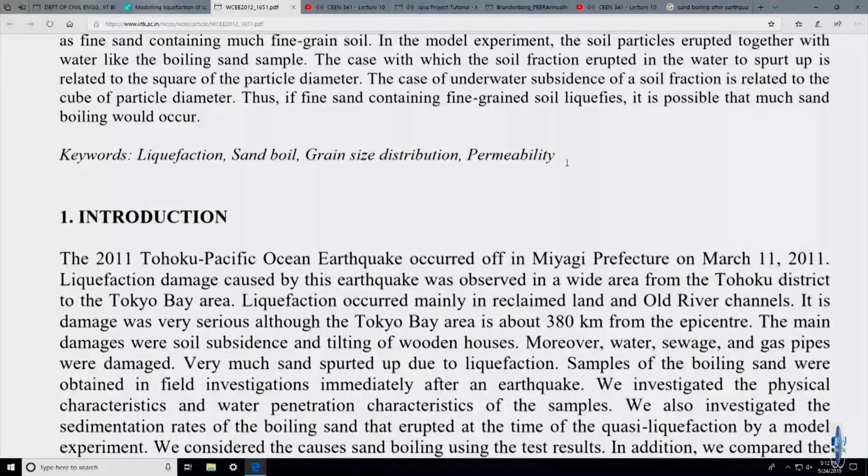I am intentionally showing you this paper because many people think R&D is something very extraordinary, but truly speaking R&D is also simple concepts which you pick up from third year onwards, and then you build on them to answer the questions which society is asking.

So, this is how sand boiling has occurred, the sedimentation has taken place, all the roads have liquefied. Look at this, this is all because of the sand boiling which has occurred. A lot of sand gets formed because of the extremely high water pressure or overpressure.

So those of you who are interested can go through this, it's a good reference for how grain size distribution helps in understanding whether the sands will boil or not. I am sure you can realize that this is a situation I have been discussing in class. These are the basic models used to see whether the materials will liquefy or not.

Some intrinsic material properties will get lost in the form of loss of fines. There is another interesting video, this is work I did along with my BTech student. Another video.

Quite interesting how seepage piping and sand boiling occur. We will try to model these situations.

So this becomes my control volume of the sample, and then I may create different types of seepage conditions. We can change the H values which are going to cause the hydraulic gradients. Look at this video, now you will see that the sand will start boiling at this point. The moment you raise the height to a certain level, this is known as critical hydraulic gradient. We will discuss this in class.

The discharge has occurred, and in no time, look at this, the sand is fully saturated, and the whole thing has become almost like a spray. So this is the time when the sand starts boiling like this. This is the condition when H by L is going to be valid, otherwise not.

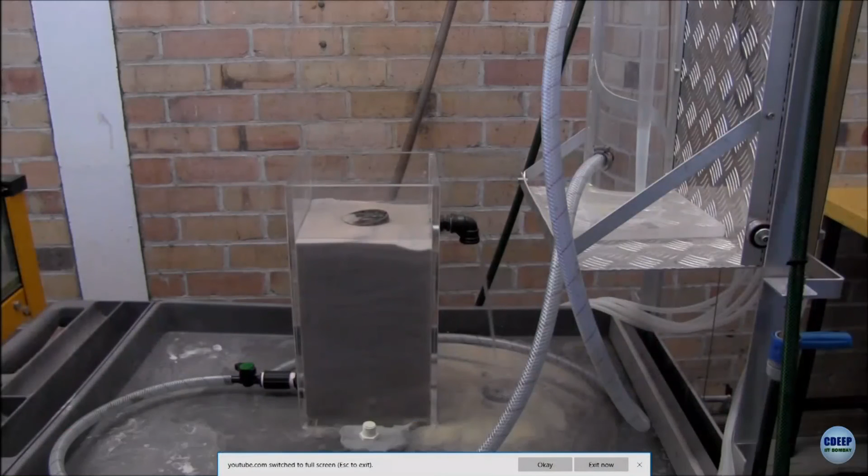Remember the seepage is being used from the bottom. There is something known as piping, and the answer for piping will also be obtained from this type of model. So the moment you open it, you can see the pipe formation over here.

This is the main cause of failures of dams and embankments which are resting on sand or sandy soil. Look at how the entire system has lost strength. So, these are good videos.

Sometime when you get time, please go to the YouTube videos of how caissons are covered. Here he is trying to show that there is no bearing in the system and that ring has sunk. So most buildings also sink like this. You have those videos on caissons.

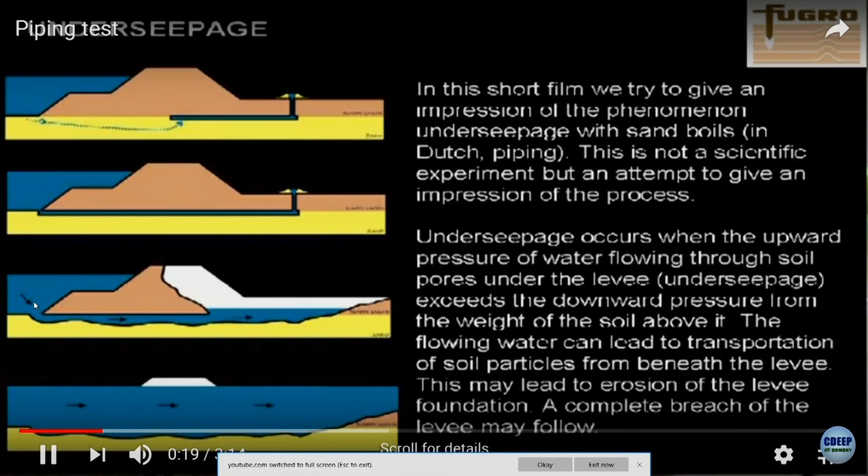I will just show you one minute. This is the pipe which gets generated in the sand bed because of the gradients, and then the whole thing liquefies. Watch this video.

So this is a dam which is being modeled, and this is retaining water. Now, if you increase the height of the dam retention, look at how the whole system is about to fail.

Concentrate at this point. So when you are increasing the height of the water column, the entire sample might yield, and that is happening at the critical hydraulic gradient. Look at this soil, this has caved in, look at this, because of the boiling process, loss of strength.

So imagine the building in which you are living, and because of geomorphological alterations, it's a big word in today's context, alright. Geomorphological alteration could be how many underground structures are being constructed in Bombay city, any idea right now? Just find it out, and what could be the impact of that.

We have discussed this, lowering of water table, alright. Mathematically we have obtained a solution, and we have shown sigma prime increases, and ultimately what happens. So these are the models which you can go through, fine. So a hydrostatic case has got converted into a seepage case, and seepage is causing all this to happen.